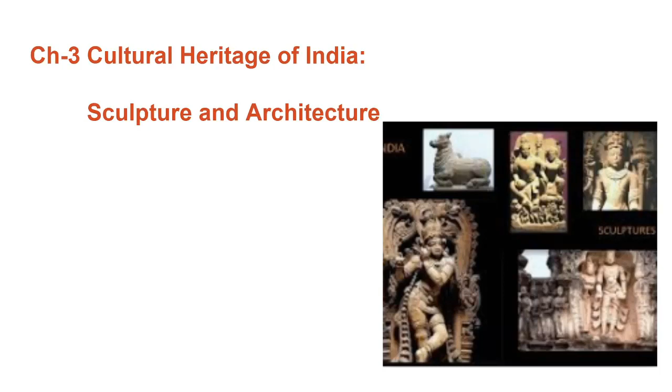We are learning social science of 10th standard, and from the previous video we started with the third chapter. In the previous video we talked about architecture and sculpture, what is the meaning of that and the difference between them. Now in this video we are going to talk about one of the most important sites of Indus Valley civilization, known for best town planning, and that is Mohenjo-daro.

Mohenjo-daro is a Sindhi word. Let's see about that. In 1922, almost before 100 years, archaeologists named Rakhaldas Banerjee and Dayaram Sahni found remains of huge town planning during excavation work carried out under the guidance of Sir John Marshall and Colonel Mackay in Larkana district of Mohenjo-daro. Mohenjo-daro means the heap of the deads. So it was excavated almost before 100 years, under the guidance of Colonel Mackay and Sir John Marshall. Right now it is located in Larkana district, which is in Pakistan.

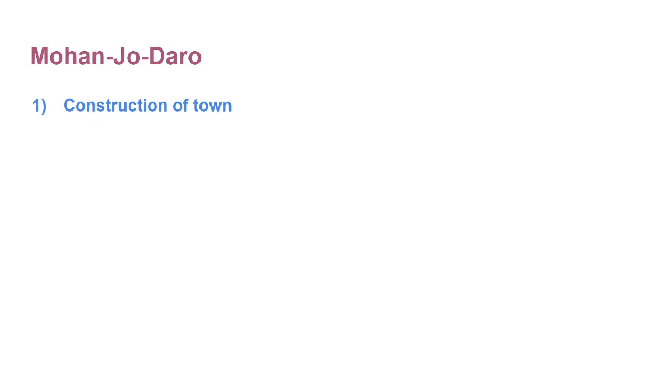So it is one of the most important archaeological sites of South Asia, and it is a World Heritage Site by UNESCO. Why is it known for best town planning? Let's talk about that. First of all, we will talk about construction of the town, how that town was constructed. From the point of view of town planning, Mohenjo-daro is the best.

Houses were built on high plinth to protect them from floods and dampness. The houses of the rich people were double-storied, having 5 to 7 rooms, while those of poor people were single-storied, having 2 or 3 rooms.

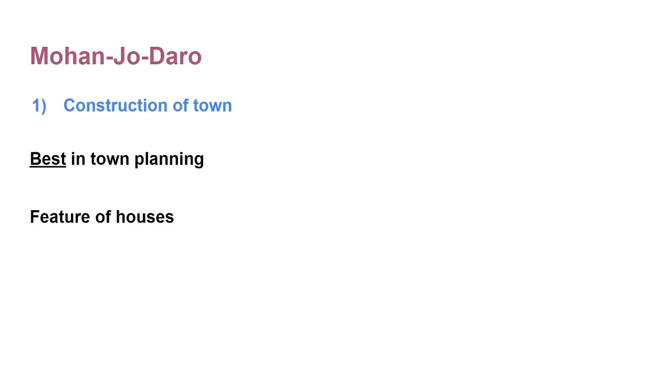The town was fortified. What do you mean by that? Fortified means to make strong. The town was protected by high walls around it.

The people of Mohenjo-daro lived in houses that had similar features throughout the town. They consisted of a central courtyard surrounded by rooms, and almost every household had individual toilets and bathrooms. The main entrance of the houses opened on the side lanes and not on the main roads. This is one of the most important features, right? Remains of storehouse, kitchen and bathroom were found in every house. There was proper arrangement of doors and windows to keep the houses airy and ventilated.

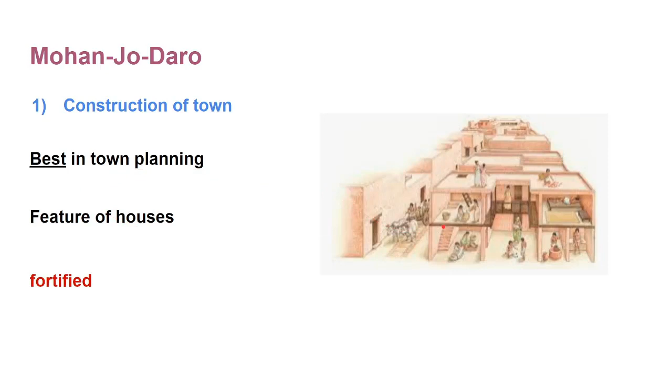So here you can see one picture. It shows the construction of the town.

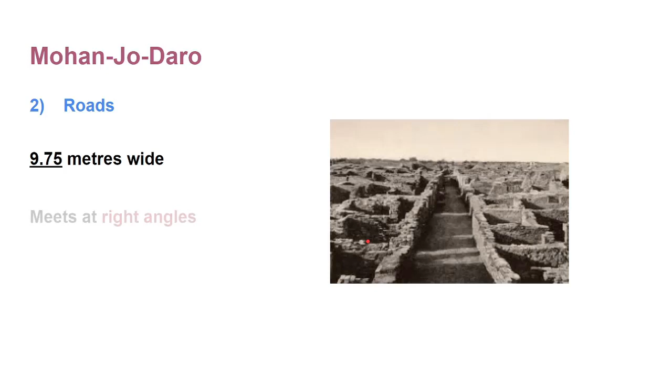Next one is roads. Roads are the main feature of this town planning. The roads were 9.75 meters wide. The small link roads crossed the major ones at right angles. Here you can see small roads crossed the major ones at right angles. The roads were wide enough for a number of vehicles to pass at a time. Pits on the roadside suggest that there might have been lamp posts.

Roads of the town were straight main roads without any turn. This is considered to be a speciality of ancient times. There were 2 main roads, one going from north to south and the other from east to west. Only 2 main roads were there, and both crossed each other at right angles.

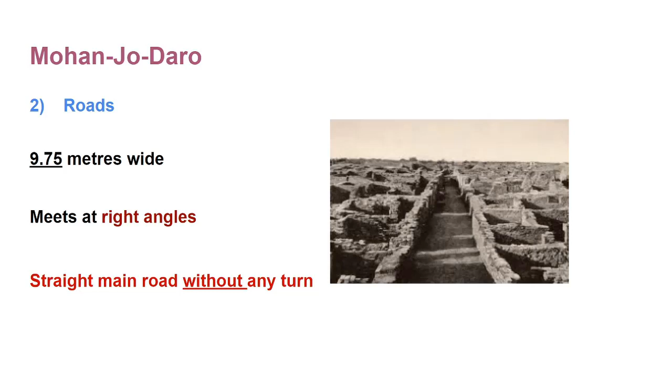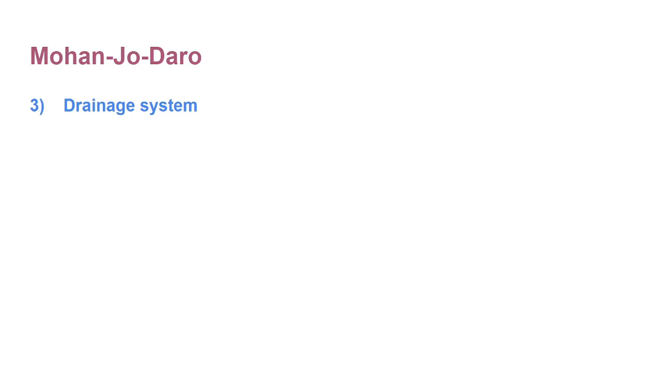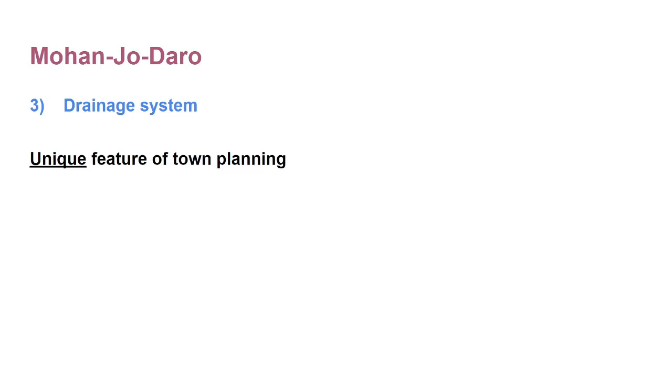The next one is the drainage system. The drainage system is a unique feature of this town planning. Such a drainage system was found nowhere except the island of Crete in the Mediterranean Sea. So the drainage system is unique, and it has the world's best channel drainage system. It was one of the most remarkable features of the Harappan cities. This system was built to drain dirty water out from the town.

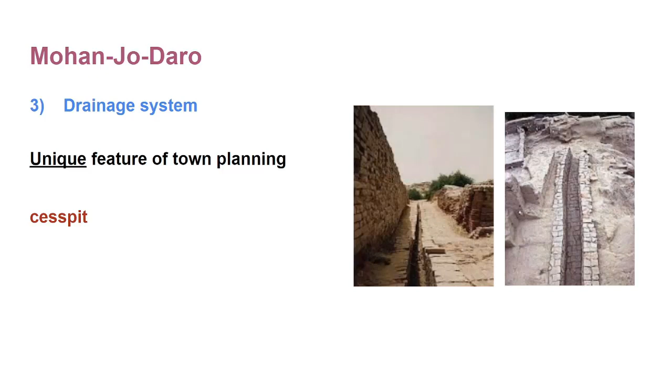Each and every house had a cesspit. So this planned, systematic and efficient drainage system clearly proves that they were very careful about their health and hygiene. What do you mean by hygiene? Hygiene means to maintain health and to prevent disease. So what is the most important part of personal hygiene? Can you tell me about that? Washing hands regularly is the single most important hygiene step. It prevents the spread of viruses and bacteria.

So when we talk about the drainage system of Mohenjo-daro, every house was connected to the main drain that ran across the city, and the whole sewage was thrown out of the city premises.

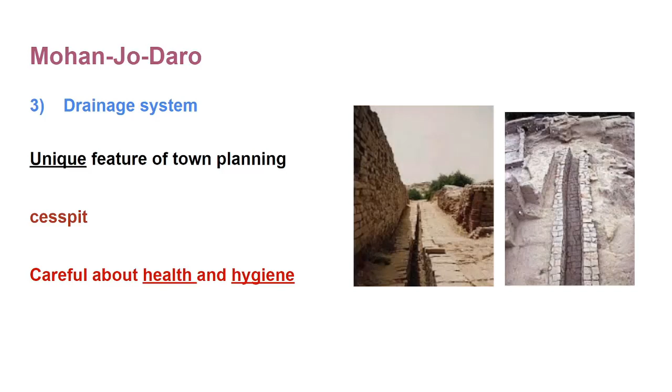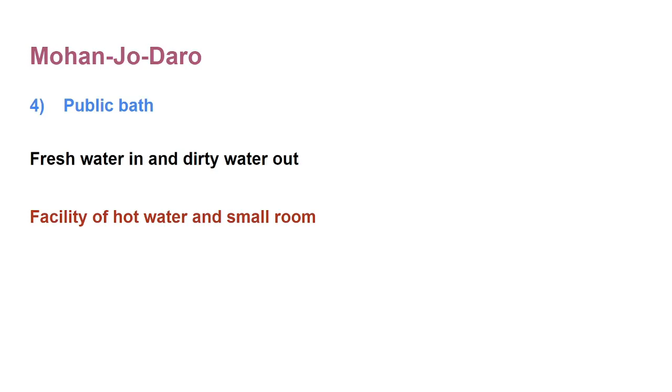Then the next one is the public bath. A huge bath was excavated at Mohenjo-daro. There was an arrangement to put fresh water in and dirty water out. There might have been facility for hot water and small rooms for changing clothes. These public baths might have been used on festivals and religious ceremonies. So here you can see one picture of the public bath.

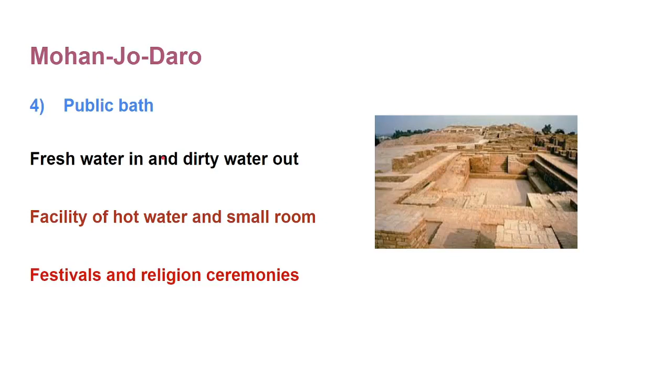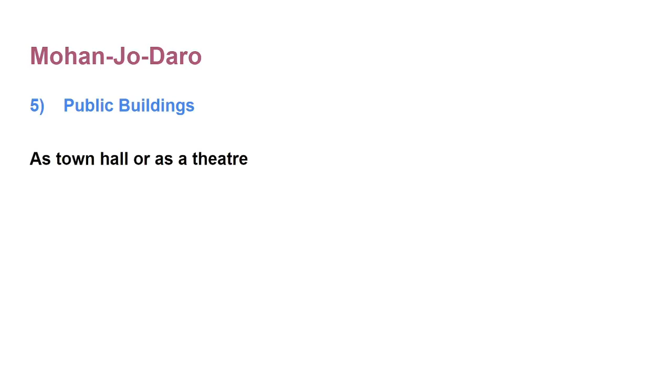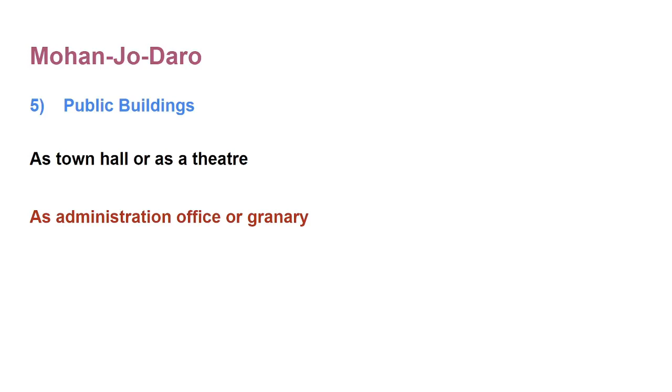Now let's talk about public buildings. The ruins of two huge buildings have been found at Mohenjo-daro. They might have been used as a town hall, a theatre, an administrative office, or a granary. The barrack of such buildings was also found out. This must have been used to accommodate soldiers.

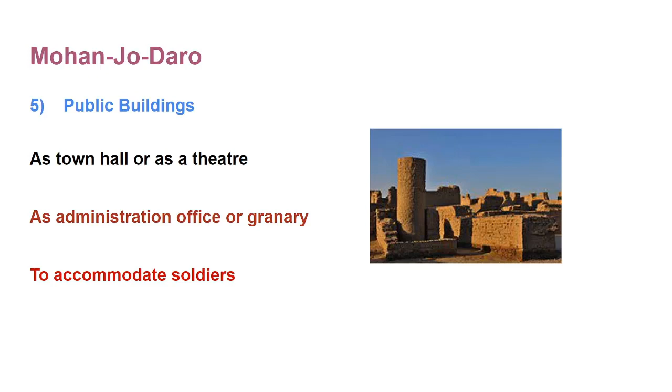So the largest public building in Mohenjo-daro was the granary, and it was divided into 27 rooms of different sizes and shapes. So it was all about Mohenjo-daro, why it is known for the best town planning. Now in the next video, we will talk about Harappa, Dholavira and Lothal.